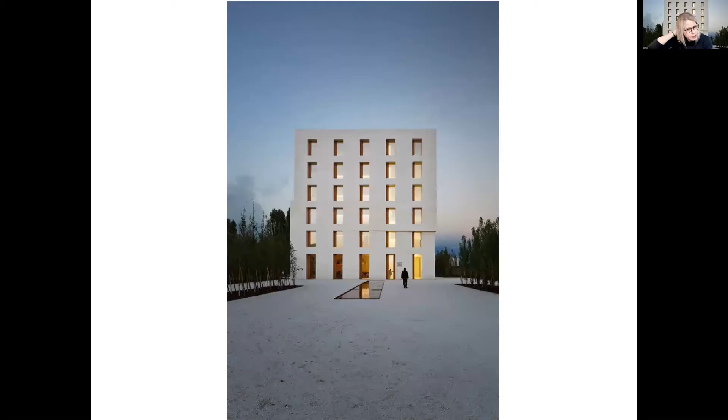You saw the headline and Frédéric just told us, our declared goal is to combine less energy with less technology. And with the construction of our first 22-26 building, because there are many other buildings now, we did this decisive step, meaning with the most elementary means of architecture, the 22-26 building offers optimal conditions for the flow of energy. And I will show you in a minute how.

The architecture of our building is interpreted as well in a completely different way, also from an aesthetic point of view. You will see that regarding its spatial and material quality, which, by the way, are the basic requirements we believe for a long-lasting building. And we believe that the 22-26 concept can be a way how buildings of the future can function.

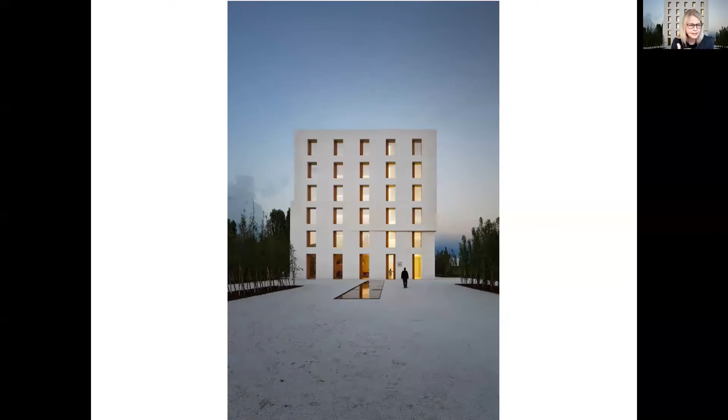So when we ask ourselves the question, how to combine the comfort of our lives with the reduced consumption of resources, we have to understand our current context. And what is our current context?

For once, we live in this moment in a society where we change from an industrial-oriented society to a service-oriented society. The question is, what does this mean in relation to architecture? First of all, the only thing it really means is that the future must be different from the past, because there is no other discipline mirroring the values of a society as much as architecture.

You know that, because architecture is not an individual task. It always is a task where a lot of people of society are involved. Architecture never represents an individual thinking, but a collective thinking, including governments, investors, developers, citizens, engineers, artists, sociologists, etc.

So the question is, what is really changing if we compare the beginning of the 20th century to the beginning of the 21st century? And if we look at these numbers from the Intergovernmental Panel on Climate Change, the contribution of the greenhouse gas emission in the maintenance of buildings is 18%. It's the violet part of the diagram. What the diagram does not show is more than 1/3 of the 33% of industry emission is also related to buildings. It is related to their fabrication.

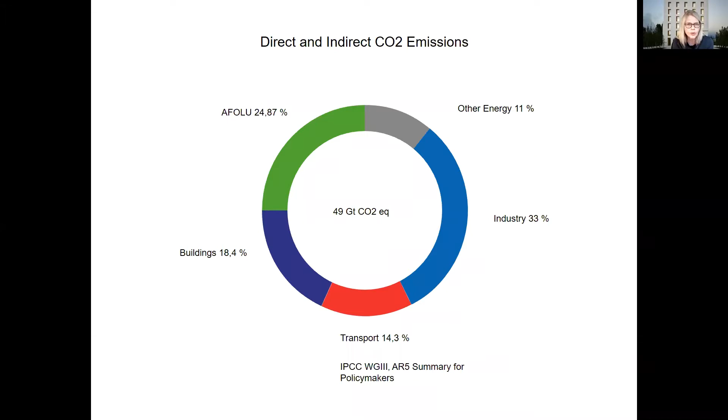But we observe that one factor of that increase is, for example, enhanced technology. And it is not necessarily the investment cost in this technology, but it is its maintenance cost. Therefore, we at Baumschlager-Eberle asked ourselves two questions. First, how to make buildings more efficient in maintenance costs for the users. And second, how to increase the comfort of a building by reducing the impact of greenhouse gases of carbon dioxide.

So when we speak about buildings in the future, we think we have to speak about comfort. Comfort in physical terms is about acoustics, humidity, air quality, and it is about temperature. So how do we understand a building? If you look at this graphic representing a normal building without any specific use, the blue line, the lower line, is the development of the outside temperature for 1 year.

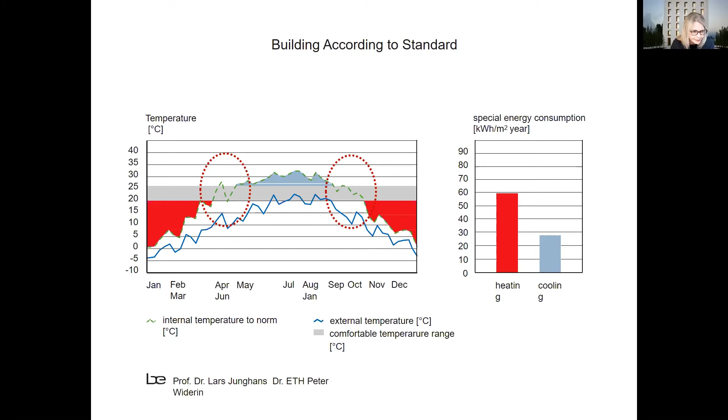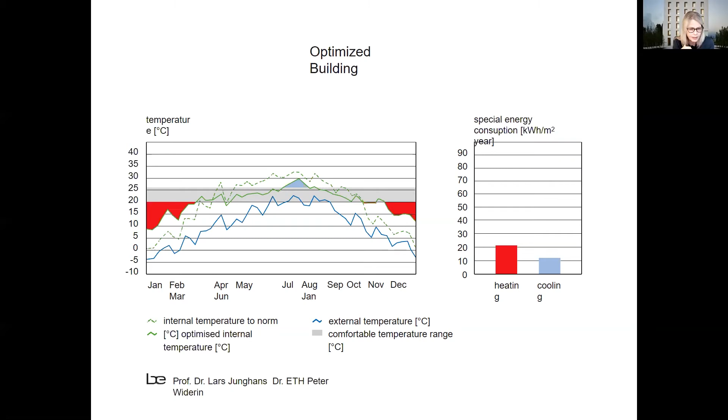So what we were interested in over the last 20 years is a strategy how to optimize buildings only in an architectural and geometrical way. And when you do that, you get results like that, where the periods where you do not have to heat or to cool are extended. And again, this optimization is only about architectural and geometrical questions. So we believe in every situation in the world, according to the local climate, you can optimize a building in relation to architectural questions. Here are some questions.

So for us, the key question is, which is the most reasonable building in terms of architecture, and this in the context you built? And that's what we did over the last 20 years with the design of our buildings. When you want to optimize your building, you must optimize your design, and you can have a lot of different ratios and relationships and standards how to optimize your building.

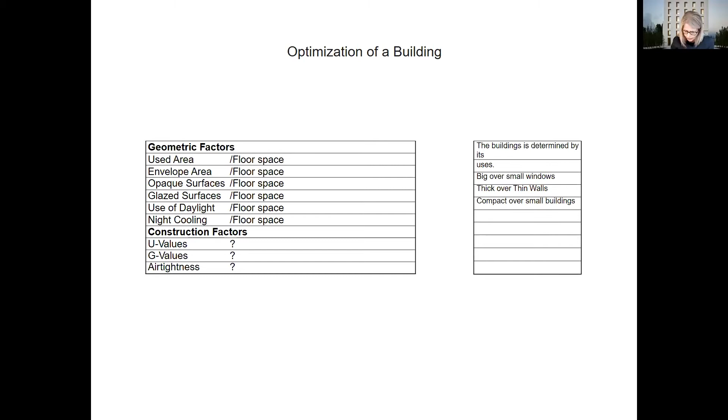So now I show you our prototype building called 2226. It is quite a small building with 3,000 square meters of gross floor area. It is a perfect cube, 24 meters high, 24 meters wide, 24 meters long.

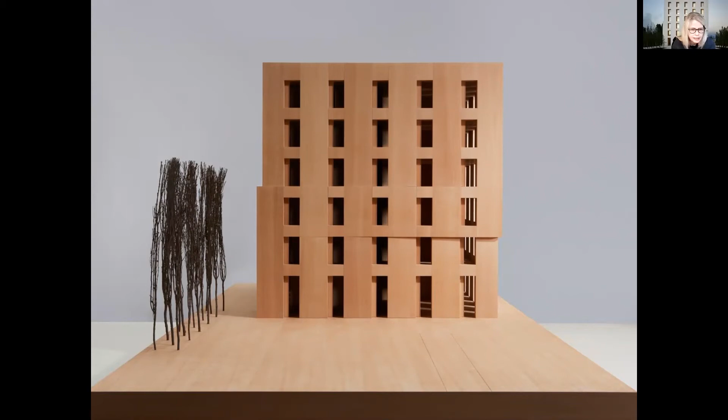The location is not far from Lake Constance in Austria, in between Switzerland to the left and Germany to the north. And the site is quite interesting because, as I said earlier, it enjoys a very continental climate, meaning it can undergo large temperature swings during a day and experience very hot and dry summers and very cold winters.

The general layout of the building is quite simple. We have 4 big spaces around one central space, the vertical circulations. And how to use this space, in fact, history will tell us. For now, the use of the building is mixed.

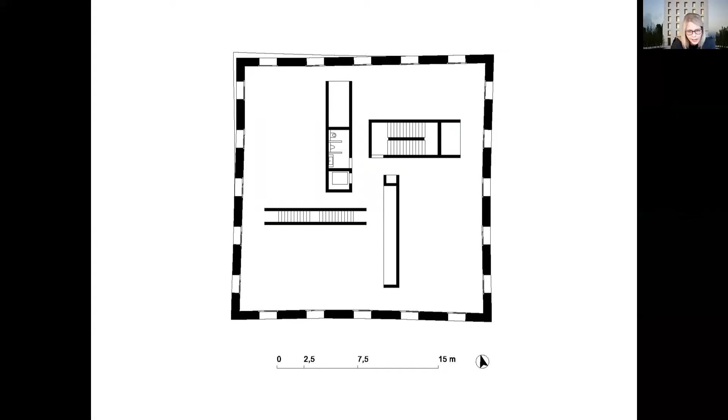You might know Zumtobel, the big lighting company from Austria. They have 1 floor. We, the architects from Baumschlager Eberle, have 2 floors. 1 area is rented for small companies, and 1 floor is rented as apartments. So we have a very diverse use in the building.

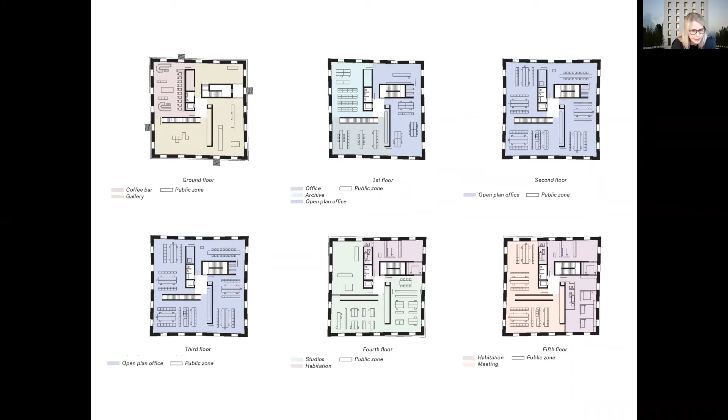Because it is very important. It was very important for us to understand how the temperature of the building would be when nobody is there, to understand the behavior of the building itself, because only then can you start on a second level to think about how the temperature will be according to different uses of the building.

So now it's the second graph that shows the building now occupied, yet without any intelligent control system. And you see with the green line, we are approaching the well-being zone. Again, the green line is the inside temperature.

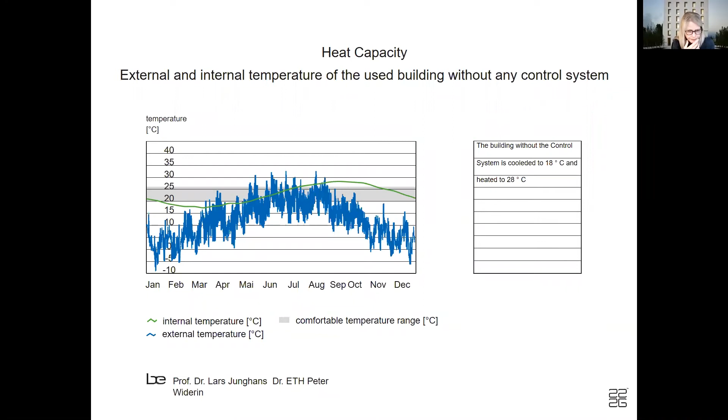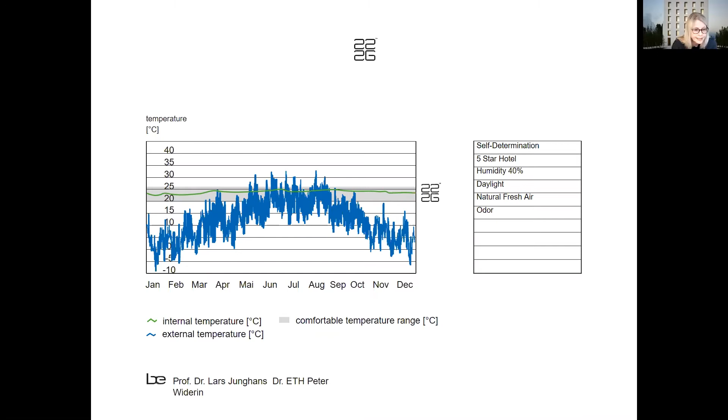And finally, now I show you this graph with real measured data from our 2226 building in Lustenau. And we can see that the green line, the temperature inside the building, remains fairly constant between 23 and 24 degrees.

So when we designed the building, finding a name was, of course, quite easy. We simply used the brief: 22-26, no less than 22 degrees and no more than 26 degrees, as there is a common agreement all over the world that people feel comfortable with a temperature between 22 and 25 degrees. We allowed ourselves that one more degree, so 22-26.

And all this without the use of any technical system whatsoever. No mechanical ventilation, no heating, no cooling system. This was a huge challenge, but also a very simple goal. So the main objective in constructing a building of this kind is not to disregard technology at all, or to do it completely without it. It is to maximize the comfort and well-being within the building.

How did we achieve this? Again, only by architectural and geometrical solutions. They are the basis, but we achieved this in addition by making the building more intelligent, by using certain sensors and software to optimize the temperature level inside the building all year long.

So in every room of the building, there are sensors for temperature, carbon dioxide, and humidity. And in the end, the software calculates what the building should do. So it is about not putting hardware in a building, but working with good software.

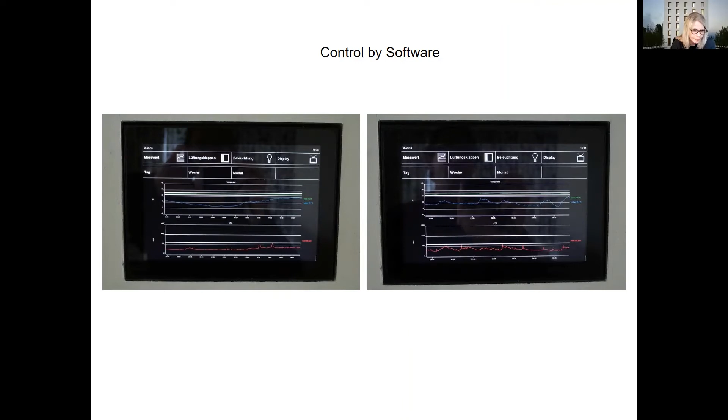When you properly calculate a modern building today, using good glass, quite reasonable materials, a design with a reasonable percentage of openings and things like that, you will find out that only 20 to 25% of the energy demand of the building is related to the outside temperature. But 75 to 80% of the energy demand is related to the people, to the use of the building.

Or in other words, if there are some engineers here, when we talk about the energy performance of a building, nowadays we talk about two phenomena. The one phenomenon is called the transmission losses and gains of the building. And the second phenomenon is called the ventilation necessity of the building.

And when we do a proper building with the knowledge of our times, the impact that is determined by transmission is only about 20 to 25%, so again, that relation to the outside temperature. But the impact that is determined by the use of a building is about 75 to 80%. So in this building, we said that we are not really interested in the transmission, but interested in the question of the ventilation necessity.

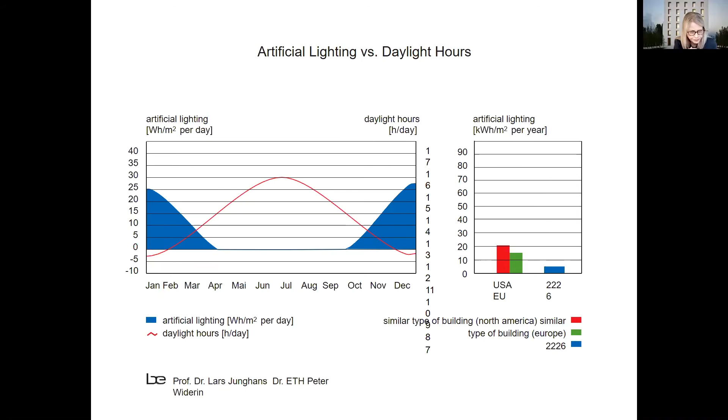So now I will show you how the building brings all of this together. So what can the building do? The building can do two things. It can open and close itself. So these are the windows with the opening flaps controlled by the software. The building can open and close the window, which, by the way, is very comfortable in use. But the user, the occupant, can override the control system and open the window himself, or forget to close them when he leaves the building, and the building will close them for you. The software, the control system, will do everything for you. You do not need to care about anything. So that's the first thing.

And the second thing the building can do, the building can switch on and switch off the light. The artificial light in our climate is only good for heating, which we use sometimes in wintertime when the building is not occupied for a very long time. But in general, the heating values become so small that it is not really interesting. So the 22-26 building is only about opening and closing itself, and always in relation to your behavior, to the behavior of the users. And again, we do not work with traditional technical devices, but with a very intelligent control system, a system that is reacting on the CO2 content of the users, reacting on the humidity, and reacting on the temperature to keep the building in its balance.

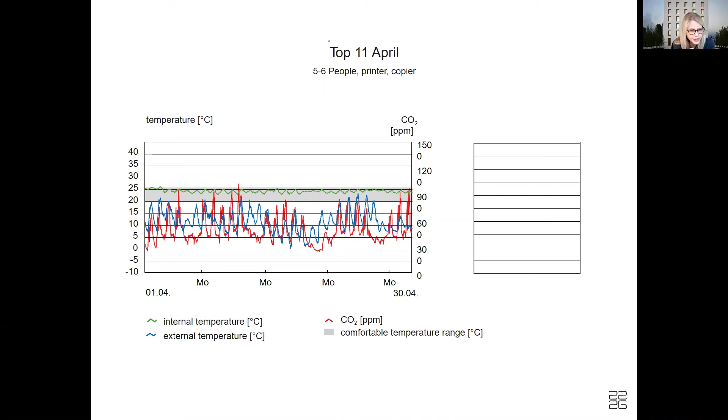And here during 1 month, you see the red line measures the carbon dioxide in the air inside the building. The blue line again is the outside temperature, and the green line is the inside temperature. And then you see that the green line of the inside temperature is only depending 0.5 degree on all of this for 24 hours.

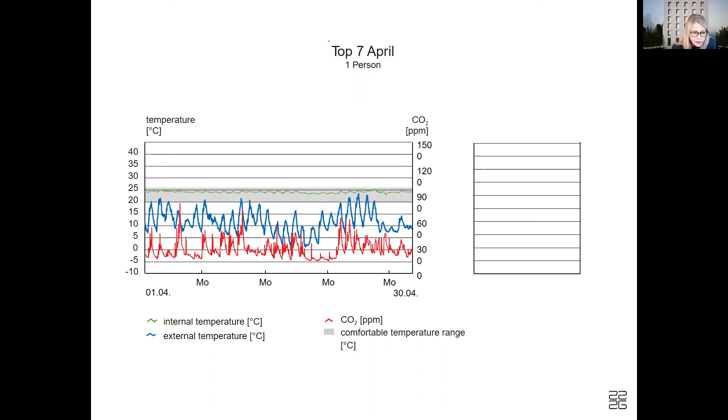So as a result, the only energy consumed is the electricity used to operate the lighting, the computers, and the coffee machines. And the energy consumption is currently around 40 kilowatt hours per square meter per year. We could even, I think, compensate and bring the consumption almost to 0 with a photovoltaic central on the roof, which we didn't do yet.

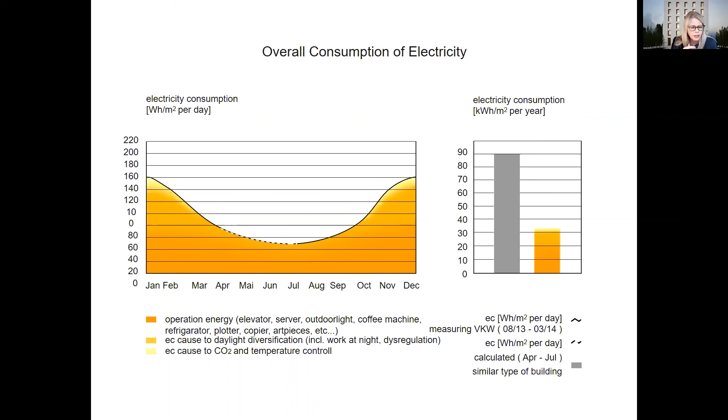The construction of the 22-26 building is very simple. Everything horizontal is in concrete, so all the slabs. This is the most important storage for keeping the mass activated. There are no suspended ceilings. The space needs to be in contact with the concrete. Again, the concrete is the storage mass. And everything vertical is in brickwork.

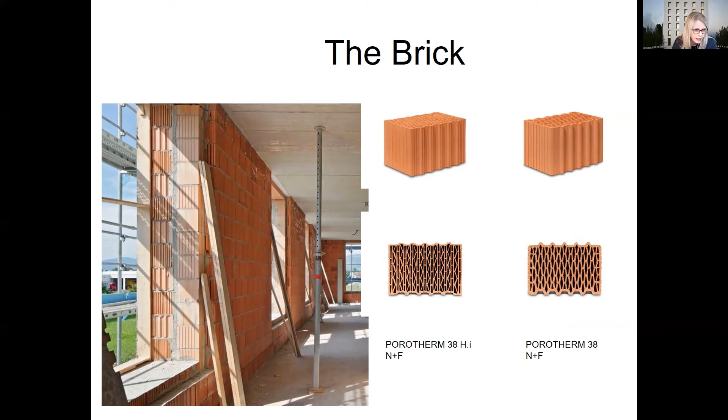And talking about the lime plaster, I have to say that the materials used in this building play a major role in creating a comfortable environment. And they all share one common characteristic. They are able to absorb and store a certain amount of heat and then release this heat together with humidity back into the space. The materials are all locally available and come from a perimeter around 30 kilometers around the location. All the material used in the building are natural, meaning without any toxic emissions.

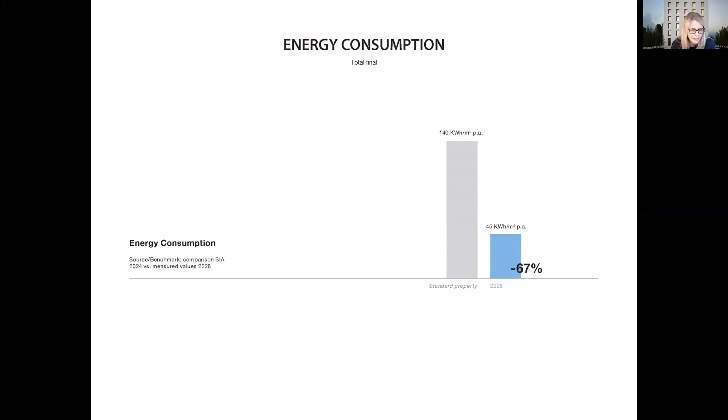The 2226 building, again, with no mechanical system, no ventilation, no heating, no cooling, leads to a reduction of energy consumption of 67%. And as a result of this strategy, without building equipment, the construction costs, of course, were also reduced by 20 to 25% in comparison to a standard property. And the real important value is that the life cycle costs are, believe it or not, almost 50% below comparable buildings. And that represents a dramatic change in the performance and offers a new perspective for future realizations.

So in order to reach that goal, we must understand that architecture is not only related to the design of a building, but to the creation of a relationship to the context and the use of the building. Because in the end, we think to build is really an act of culture.